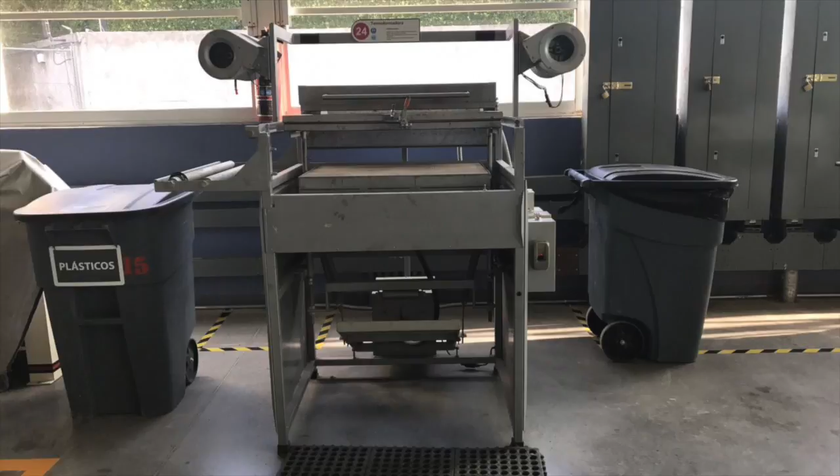The objective in this practice is to understand the thermoforming process, to know how to turn on the thermoformer, some important characteristics before using it, and we're going to learn to thermoform some pieces.

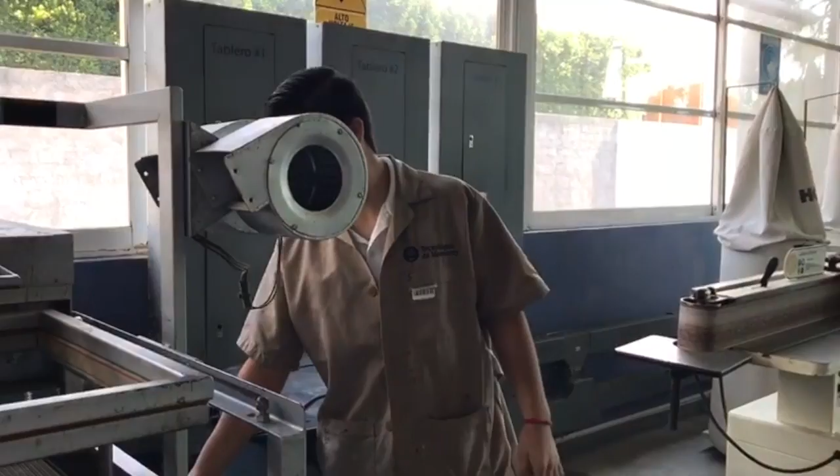To turn on our machine, first we have to energize it with this, and the second step is to switch this to on, and it will start to increase the temperature.

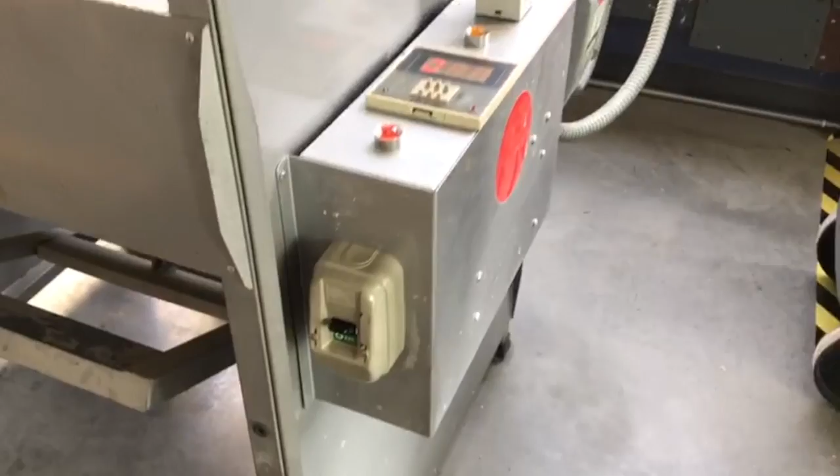Some important characteristics to know are that all the windows have to be closed because there has to be no airstream.

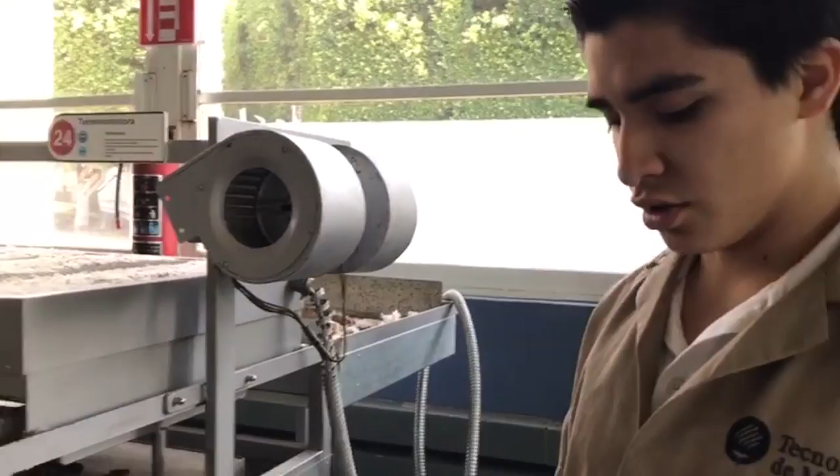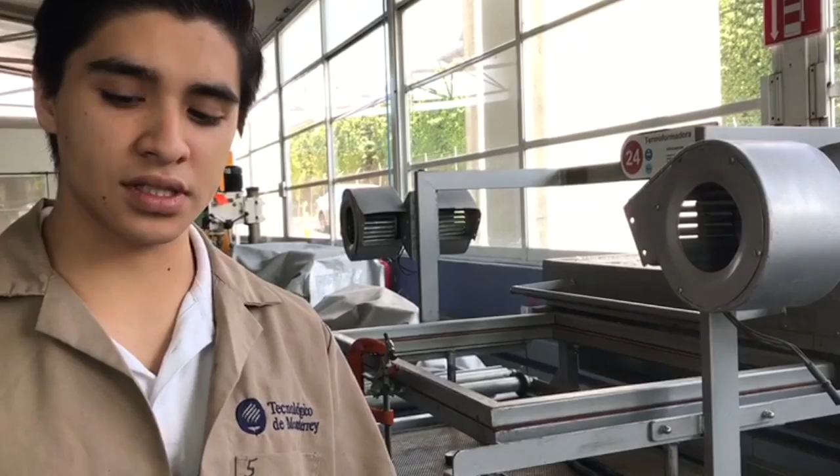Another important thing is that our plastic sheet needs to be 77 by 57 centimeters, no less and no more. The temperature needs to be set over 190 or 200 Celsius degrees, and it's important to increase it 20 by 20 degrees.

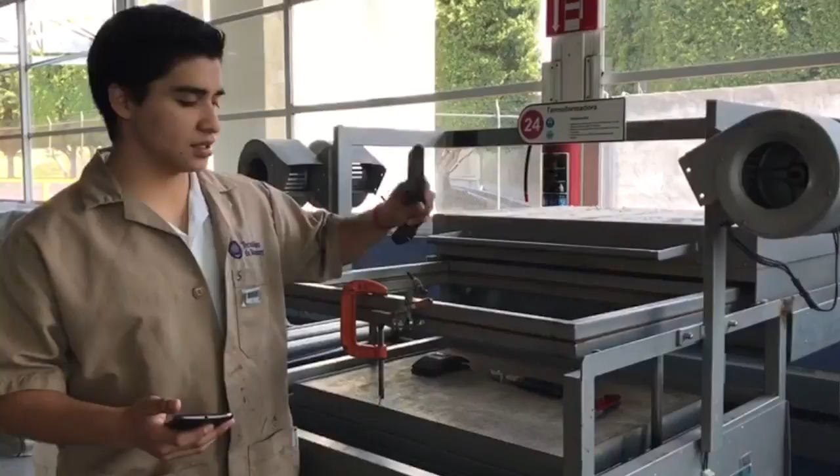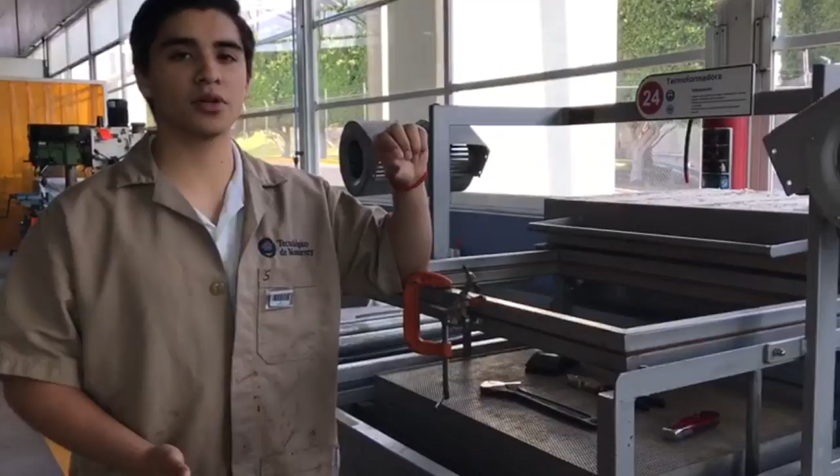Another thing is that all materials that we are going to thermoform need to be horizontal, because if you put them in vertical it will float. The last thing is that our material, in this case PET, thickness can be less than 1 millimeter or up to 6 millimeters.

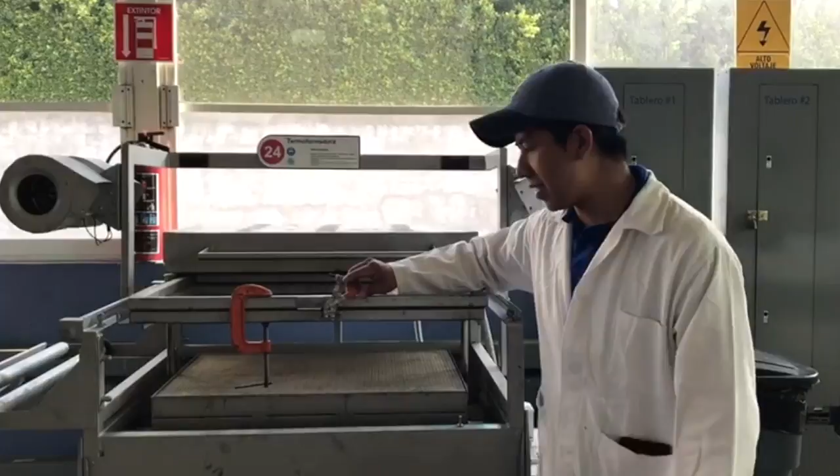As we can see, our press doesn't work, so we need to use a manual press to control the pressure when we action the lever.

To accomplish this practice, first of all we have to set the pieces. It's important to place them at least 5 centimeters apart from one another.

Once we set our pieces, the plastic sheet, it's important that we pull the oven that has the heated resistance.

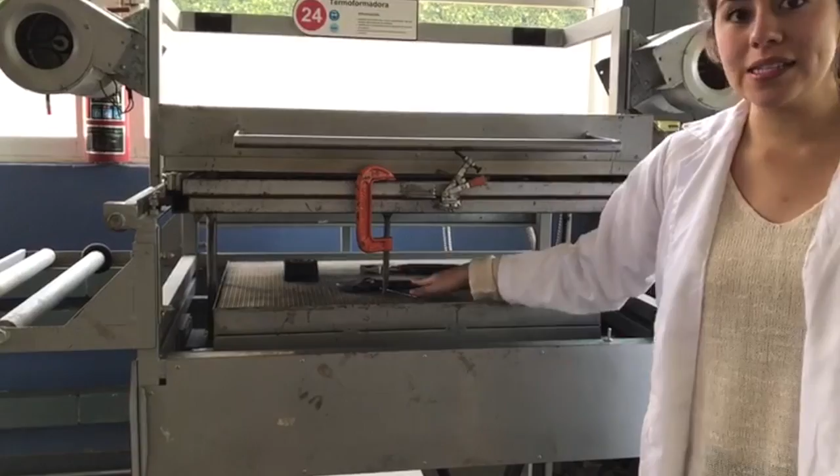Our plastic sheet will be heated, and we will know it's ready to put down when we see a bubble in the plastic sheet. It has to be placed from the biggest or tallest piece, and it has to be at least 5 or 6 centimeters apart.

Whenever the plastic sheet is soft enough and heated, we have to move this lever to the suction part, and we have to pull down the shelf. Now our thermoforming process is ready.

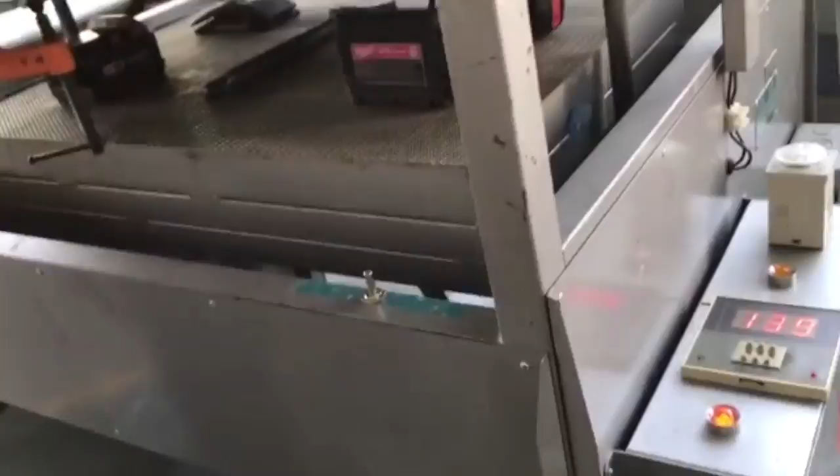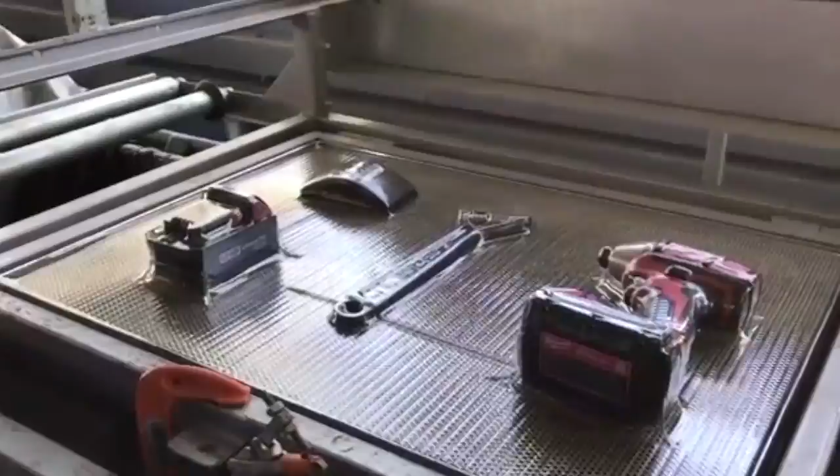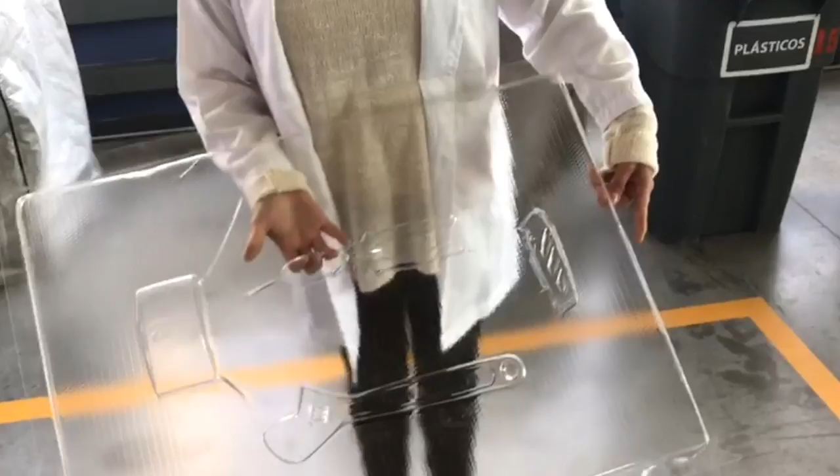This is our final product. We had some difficulties removing the pieces because they got stuck. We can see that at the moment we removed them, we broke the plastic, and it has some defects. So we learned that it's important to use a lubricant or something to avoid these mistakes.

If we don't follow some of the cautions needed in the practice, we could get some faults. The mistakes can be caused by different factors, like the pieces needing to have a curve in all the borders. If you don't do it like here, this piece has a peak, so this mold was malformed.

If the height between the pieces is too much, like here, as you can see this piece is bigger, and at the time we thermoform the pieces, it will be flawed too. To avoid these mistakes, you need to follow exactly the process that we mentioned before.

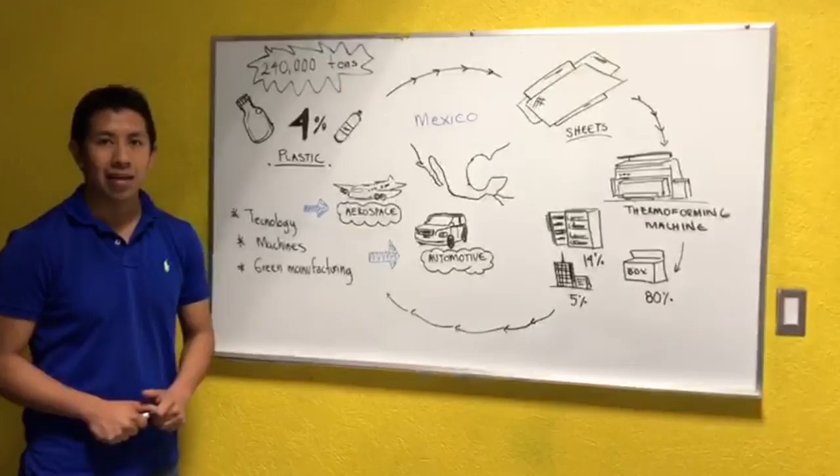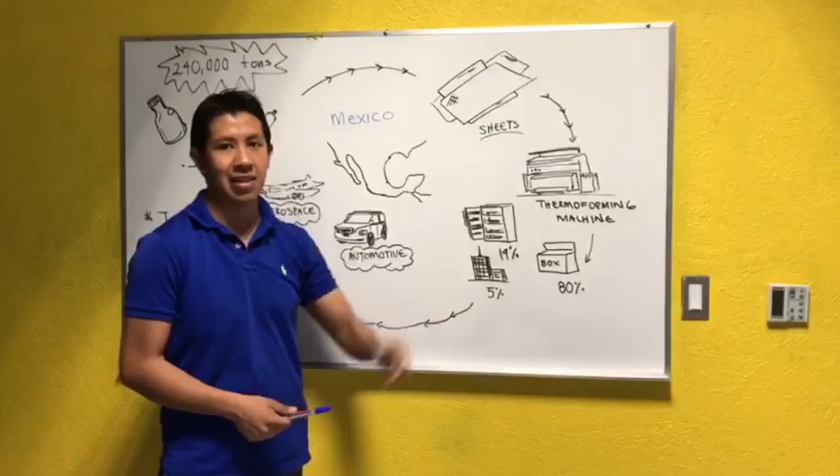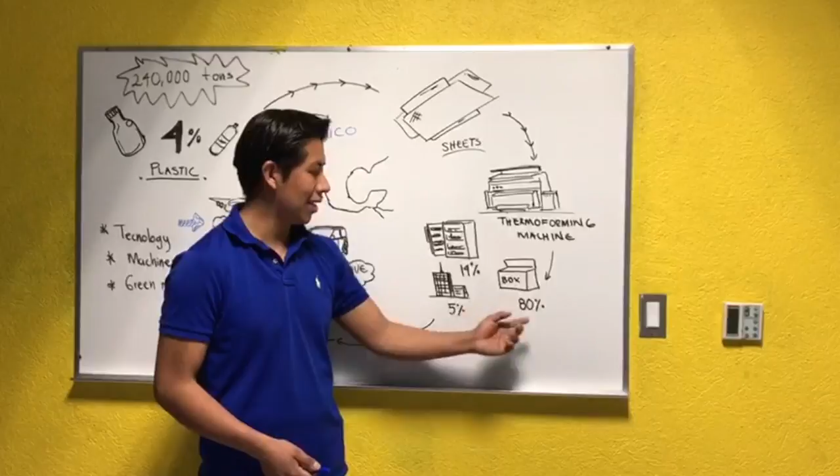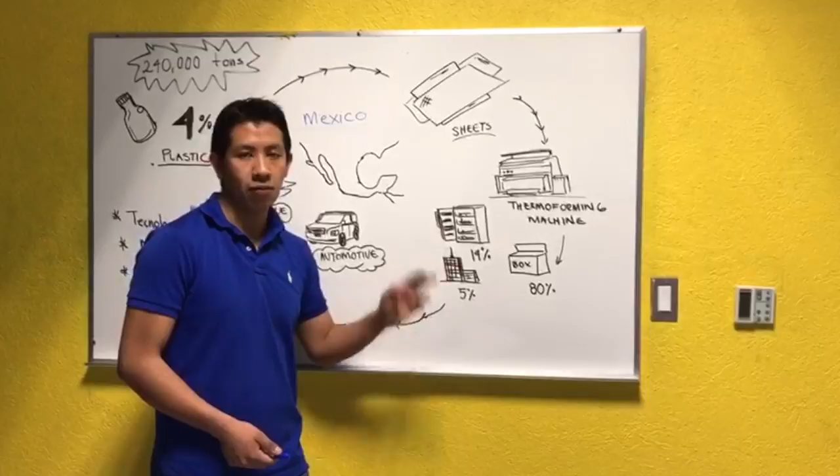In Mexico, 4% of plastic, meaning 240,000 tons of plastic, will be transformed into plastic sheets. These plastic sheets will be set in a thermoforming machine, and this thermoforming machine will produce plastic. 80% of this plastic will be used for the packaging industry, 14% for the refrigeration industry, and 5% for the construction industry.

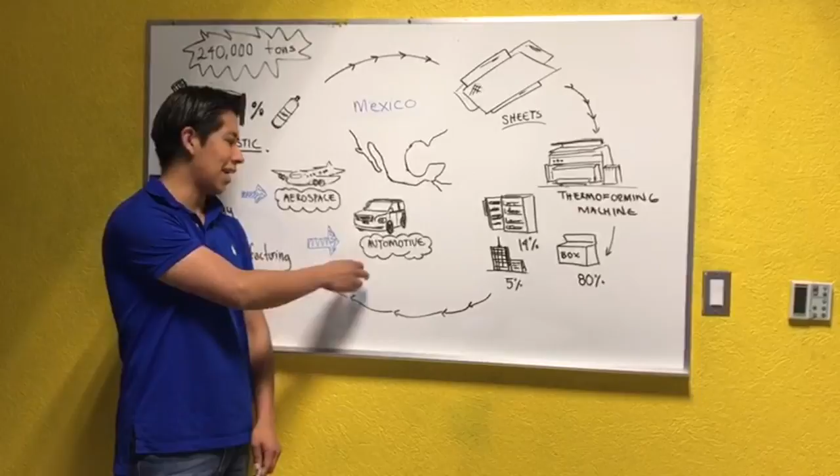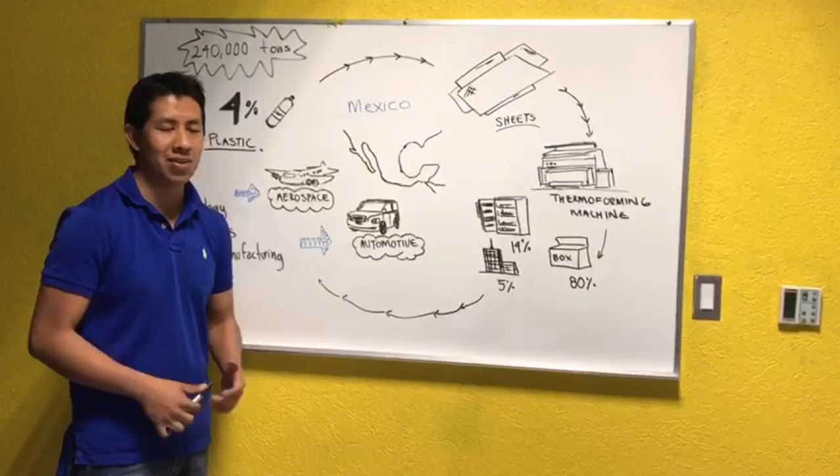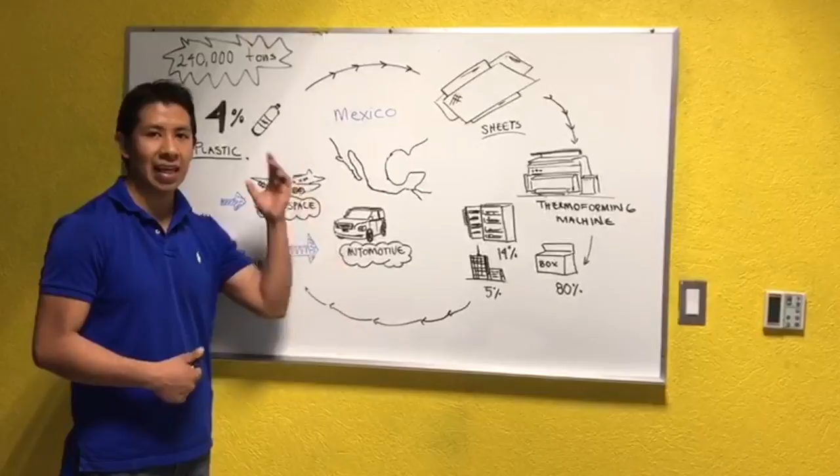However, Mexico is an important country because both the aerospace and automotive industries are needing technology, machines, and manufacturing expertise to introduce this manufacturing process. Mexico needs technology, machines, and manufacturing to introduce these important industries into this important manufacturing process that is thermoforming.